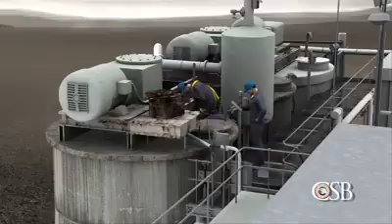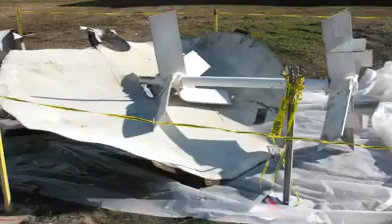On November 9, 2010, a powerful explosion shook the DuPont chemical manufacturing plant in Tonawanda, New York, a suburb of Buffalo. A contract welder was performing maintenance work on a tank that, unknown to him, contained flammable gas. The explosion blew the top off the tank, throwing the welder to the ground and killing him instantly. A second contract worker was burned.

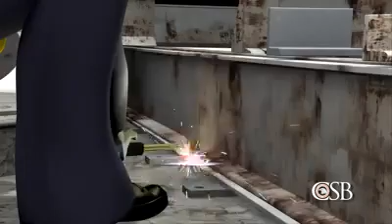The tragic explosion at the DuPont facility exposed weaknesses in how process hazards were analyzed and controlled. The result was the death of a welder in a preventable hot work accident. Hot work accidents occur when workers are welding, cutting, or grinding near flammable vapor, and were the focus of a 2010 CSB safety bulletin. Deficiencies in the safety management of hot work were among the causes of the tragedy at DuPont.

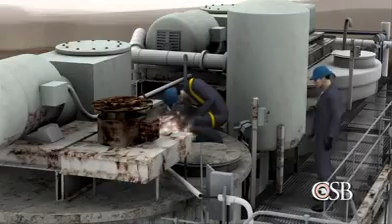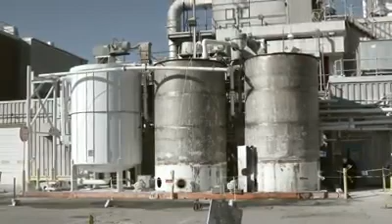DuPont's Tonawanda facility manufactures a polymer known as Tedlar, used in solar panels, and Corian for use in countertops. The process of producing Tedlar began with a chemical reaction to convert flammable vinyl fluoride gas into a slurry of polyvinyl fluoride polymer, or PVF, in water.

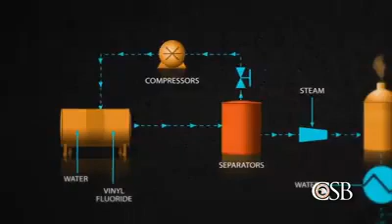The PVF slurry then passed through separators. Compressors recycled unreacted vinyl fluoride gas into the process, while a small flash tank released residual vinyl fluoride into the atmosphere. Finally, the slurry was transferred to one of 3 insulated holding tanks, usually tank number 3. Tanks 1 and 2 were reserved for slurry overflow. Tank 1 normally remained empty.

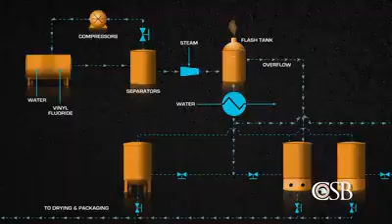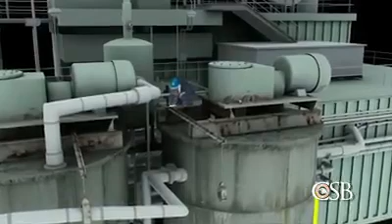On October 22, 2010, the Tedlar process underwent a planned shutdown, during which workers removed the asbestos insulation on tanks 1 and 2. Removing the insulation revealed that the agitator supports for the tanks were heavily corroded. DuPont directed contractors to repair the supports, which would involve welding and grinding on tanks 1 and 2.

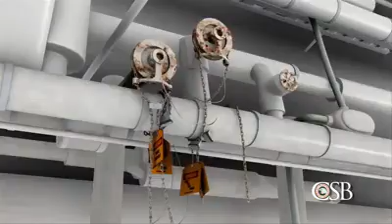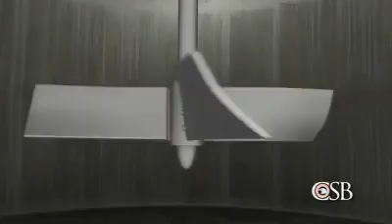The hot work on tank 2 occurred during the shutdown without incident, but the repairs on tank 1 were delayed while parts were ordered. DuPont personnel determined that it would be safe to perform hot work on tank 1 after the restart. On November 7th, DuPont operators locked all 5 valves leading to and from tank 1 in the closed position in order to stop potential slurry flow. The tank's agitator motor was also locked out.

However, DuPont personnel did not block the flow of gas inside the overhead piping, or overflow line, that connected the vapor space of all 3 tanks. They mistakenly believed that flammable vinyl fluoride gas could not reach any of the slurry tanks. But the CSB investigation found that even in normal operations, vinyl fluoride was not completely removed from the slurry and was always present in the slurry tanks in varying amounts.

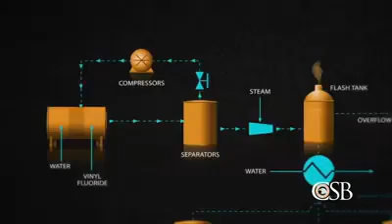When the process restarted on November 6th, the flammable gas was able to travel from tanks 2 and 3 through the open overflow line into tank 1.

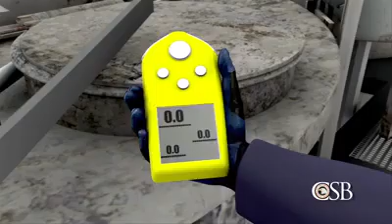On the morning of November 9th, a DuPont technician tested the atmosphere above tank 1, where welding would later take place. There were also 2 continuous air monitors in the vicinity. No flammable gas was detected, and the hot work was cleared to begin. But no testing was done to measure or monitor the atmosphere inside the tanks, where, unknown to the contractors, the flammable gas was at dangerous levels.

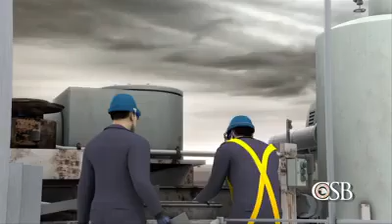Around 9 a.m., 2 contract workers began welding and grinding on tank 1. The welder connected his safety harness to the tank's agitator support and worked on top of the tank as the foreman looked on from the nearby catwalk.

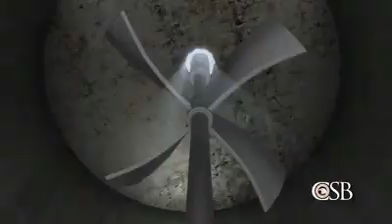At approximately 11 a.m., the welder was repairing corroded portions of the agitator support beams directly above the flammable gas. A hole around the agitator shaft may have provided a pathway for ignition. Welding sparks could fall into the tank, even as flammable gas might drift upward toward the sparks. The ignition of the vinyl fluoride caused a powerful explosion.

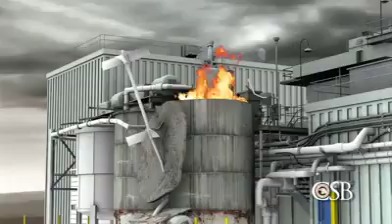The force of the blast blew the top of the tank almost completely off. A flash fire erupted that consumed the flammable gas and quickly burned out. The welder was thrown to the ground, killed instantly from blunt force trauma. The foreman's face and arms were burned.

Mark Wingard was a member of the CSB team that investigated the accident at DuPont. Had DuPont technicians tested Tank 1 for a flammable atmosphere, they would have known that any hot work presented a serious explosion hazard. But plant engineers did not realize that significant amounts of flammable gas could be present in the slurry tanks, and the testing was never done.

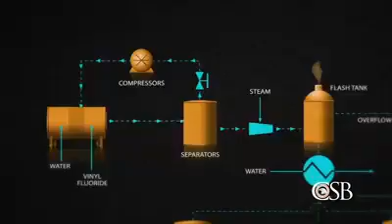DuPont regarded most of the Tedlar production process as covered under the OSHA standard for Process Safety Management, or PSM, and therefore subject to stricter operating and maintenance requirements. But DuPont personnel did not include the slurry tanks in the facility's PSM program. In a 2009 process hazard analysis, DuPont erroneously concluded that flammable vinyl fluoride gas could never reach the tanks in dangerous quantities.

We found that the contractors did obtain hot work permits for welding on Tank 1, but those permits were authorized by DuPont employees who were unfamiliar with the specific hazards of the process, and the permits did not require testing the atmosphere inside the tanks.

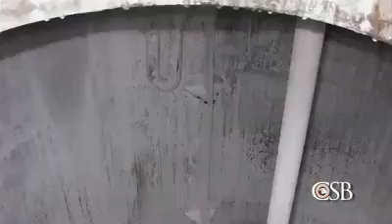Two additional factors may have contributed to the tragedy. Prior to the explosion, DuPont personnel had discovered that slurry tank number 2 had a hole in a liquid trap, which was designed to prevent the flow of gas from the flash tank. Without a liquid seal in the trap, there was an additional pathway for vinyl fluoride gas to flow into the tanks. However, this hazard went unrecognized, and DuPont engineers concluded that it would be safe to return the tank to service. No formal management of change review was conducted.

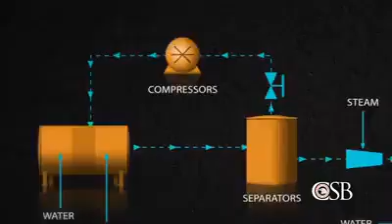Further adding to the danger, on November 8th, there was a malfunction in a compressor used to strip vinyl fluoride gas from the PVF slurry. As a result, the slurry contained more than the normal amount of vinyl fluoride. Once again, DuPont personnel did not formally analyze the safety impact of continuing to operate with a malfunctioning compressor.

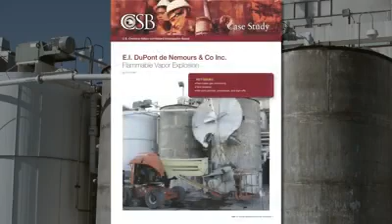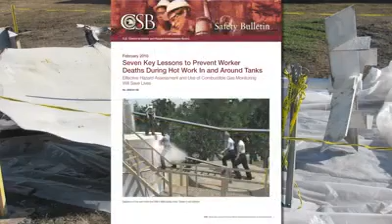In its final report, the CSB recommended that DuPont revise its corporate policies to require atmospheric monitoring inside tanks before and during any hot work. And the board recommended that DuPont require all process piping, including vent lines on tanks, to be positively isolated before authorizing any hot work. In our 2010 Hot Work Bulletin, the CSB identified 11 accidents similar to the one at DuPont. All involved hot work on tanks that ignited flammable gas inside.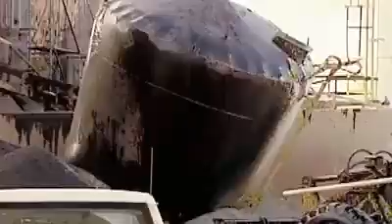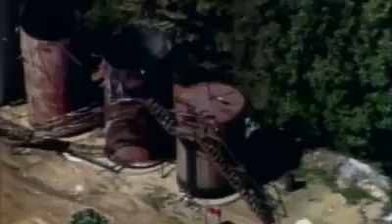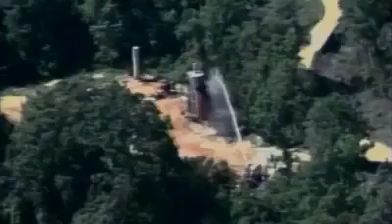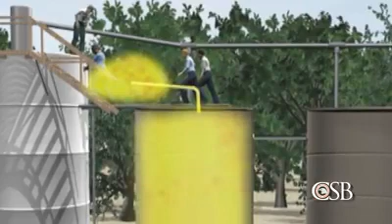In all cases, the CSB found that there was not an adequate system in place for monitoring the atmosphere for flammable vapor where hot work was to occur. For example, in June 2006, 3 contractors were killed and another seriously injured in an explosion at the Partridge-Raleigh oil field in Raleigh, Mississippi. The contractors were welding on one of 4 storage tanks when welding sparks ignited flammable vapor flowing from an adjacent tank. As was the case at DuPont, no monitoring was performed to test for flammable gas inside the tank, and piping to the adjacent tank was not isolated.

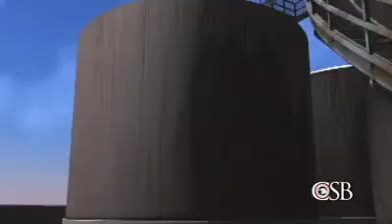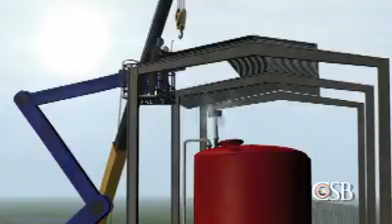In July 2001, an explosion killed 1 contract worker and injured 8 others when welding sparks ignited flammable hydrocarbon vapors in a large sulfuric acid storage tank at Motiva's Delaware City refinery. And in January 2006, 2 workers died and another was seriously injured in an explosion at a municipal wastewater plant in Florida when hot work ignited vapor inside a storage tank of highly flammable methanol. In all of these cases, combustible gas monitoring either was inadequate or wasn't performed at all.

In its 2010 safety bulletin, the CSB said companies can prevent hot work accidents by analyzing the hazards, enforcing rigorous training and permitting procedures, constantly monitoring the atmosphere for flammables, and avoiding hot work in favor of non-spark producing methods whenever possible.

Hot work is often seen as a routine activity, but it can prove deadly if fire and explosion hazards are overlooked. Thank you for watching this CSB safety video.